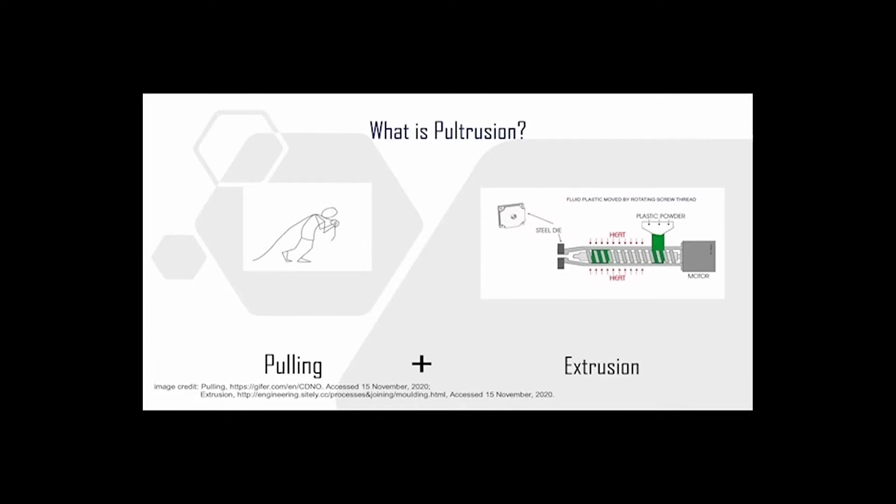It's a process that forces a thermosetting plastic through a heated die to form a specific shape, similar to the extrusion process. But instead of the material being pushed through the die, the material is pulled through in a pultrusion process. The introduction of the reinforcing fibers is a key feature of pultrusion.

It creates a composite polymer that is capable of handling high levels of mechanical stress while being much lighter than other materials with similar mechanical properties.

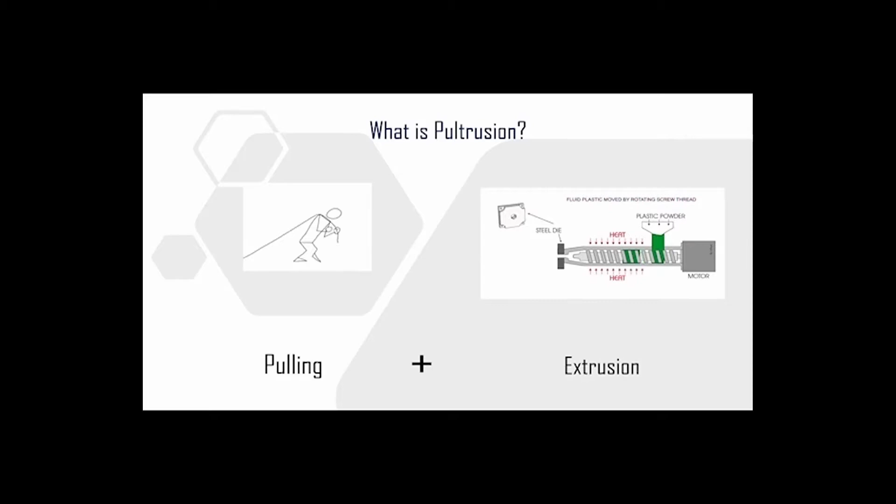So what kind of fibers are used for this reinforcing? Let's take a look at a few.

The most commonly used reinforcement material is glass fiber. This type of fiber has the benefit of being very inexpensive. It's also very lightweight, so it won't add much to the final weight of the product.

It increases the tensile strength of the composite product so that it won't break under tension, and it increases the resistance to impact and chemical degradation so the final product will last for a long time.

Some common polymer products that are reinforced with glass fibers include boat hulls, fiber optic cables, and large blades to be used on wind turbines.

Carbon fiber is another widely used material for polymer reinforcement. Carbon fiber is useful because it is incredibly lightweight, but while it is lighter than glass fibers, it is significantly more expensive. It is also strong and flexible.

When compared to a steel cable, a carbon fiber reinforced polymer cable had a higher tensile strength while having only 20% of the weight by mass of the steel. This makes carbon fiber an excellent choice when high strength to weight ratios are needed.

Carbon fiber reinforced polymers are commonly found in the aerospace industry. They are used in some sports equipment such as golf clubs and snow skis, and they are also used in the construction of high-performance automobiles.

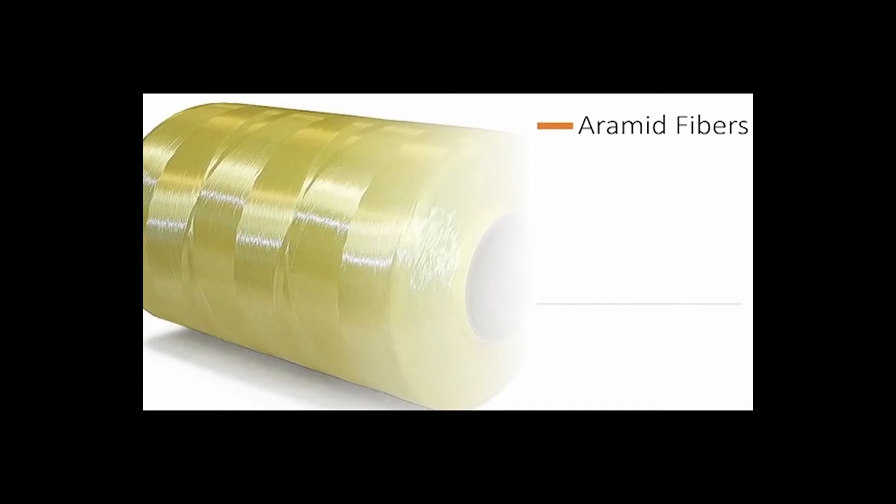Aramid fiber, more commonly known as Kevlar or Nomex, is also widely used in the pultrusion process. Bulletproof vests are constructed of Kevlar, so a polymer reinforced with this material should be expected to have an extremely high impact resistance. Aramid polymers are also very lightweight, and they have a very high resistance to heat and corrosion.

Aramid fibers can be found in things like hard hats, tennis racket strings, and in polymer materials that need to be incredibly resistant to heat or impact.

So we know that pultrusion produces a final product that is lightweight and durable, but how do we go about introducing the reinforcing fibers to the polymer material? Let's take a look at this animation to get a better understanding of the pultrusion process.

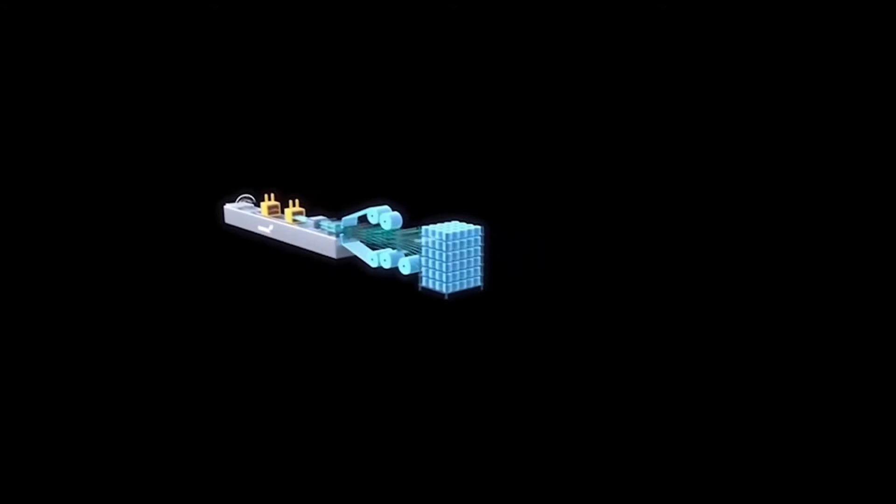Here we get our first look at a typical pultrusion machinery setup. The process starts here at the creel, where spools of the reinforcing fibers are housed and fed to the later stages.

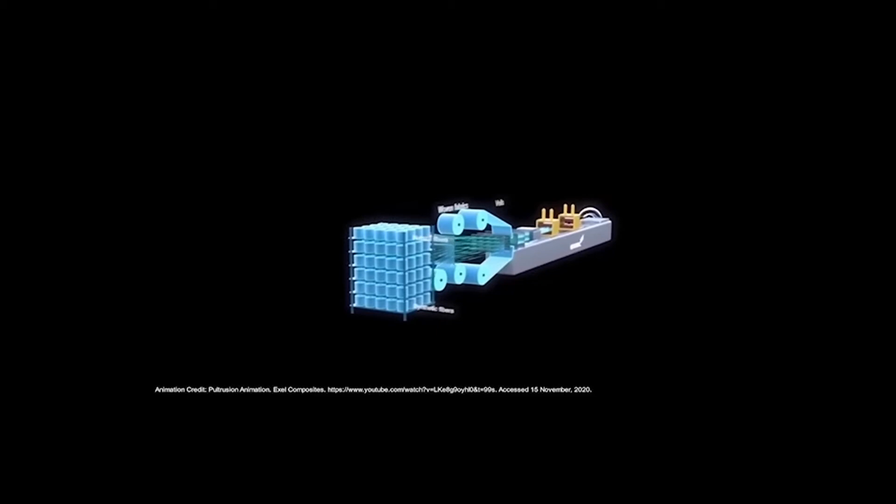In addition to the fibers, some setups will have woven fabrics that are used as veils or coverings that add an extra layer of protection for the underlying material.

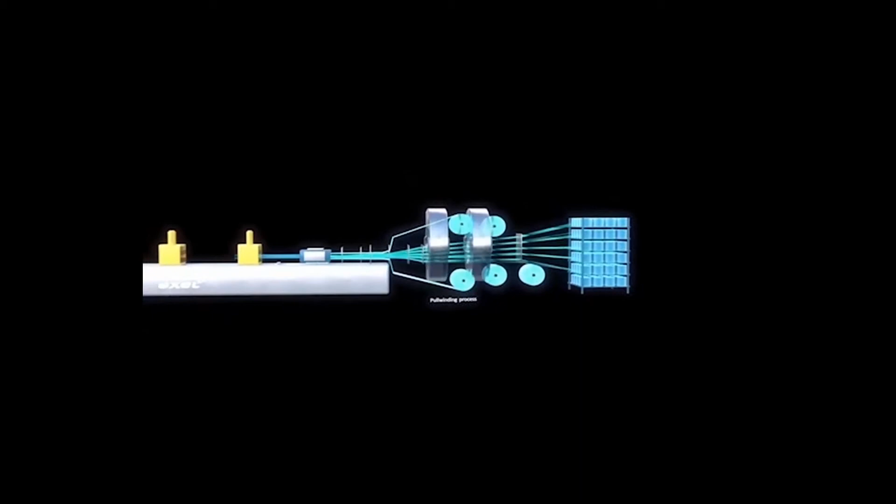Here we see the pull winding process, where the fibers are braided into a shape that will be integrated into the final polymer product.

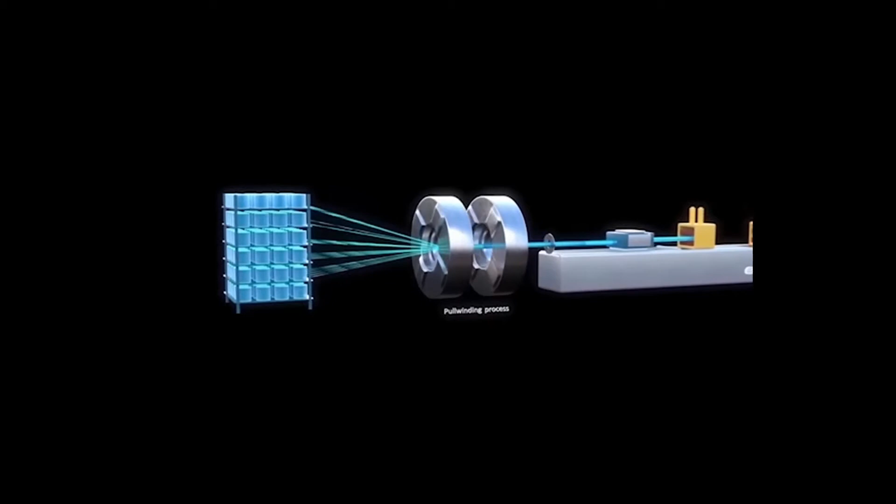After the fibers have been wound, they need to be impregnated with a thermosetting resin. This can be done in several different ways, but common methods include running fibers through a resin bath or injection of the resin into the braided fibers.

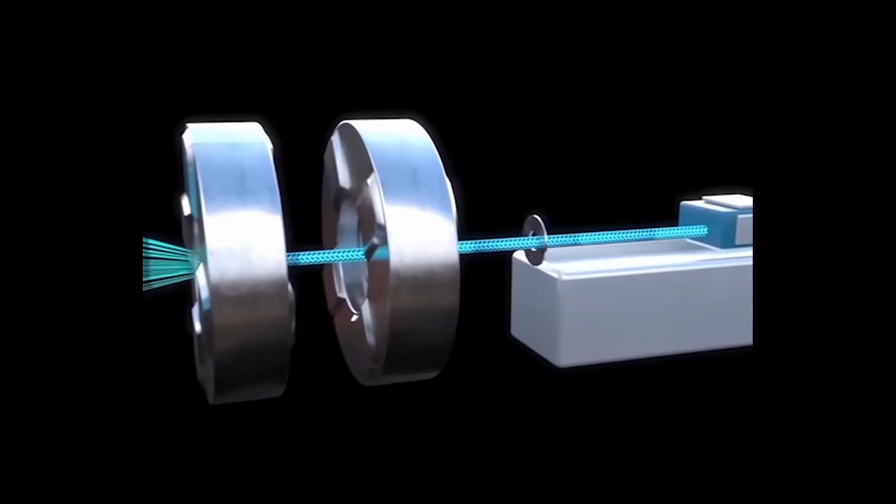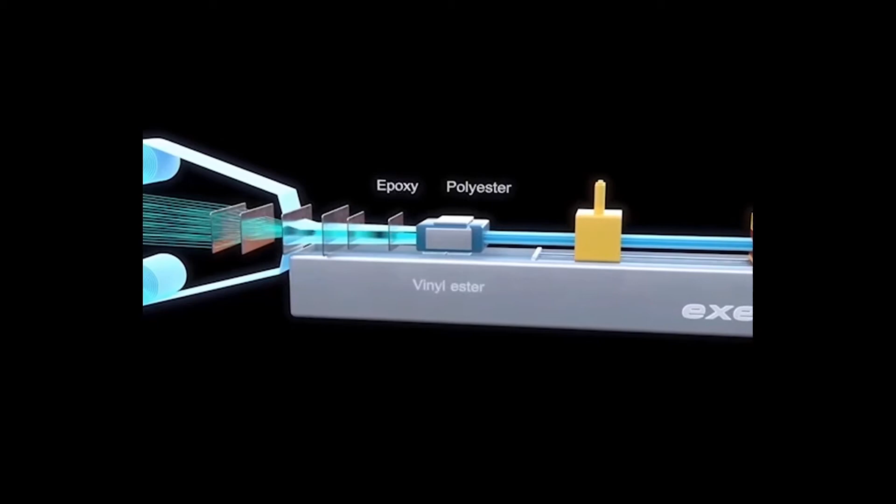There are several resin options to choose from. Polyester is most commonly used, but epoxy, vinyl ester, and polyurethane all have applications in the pultrusion process.

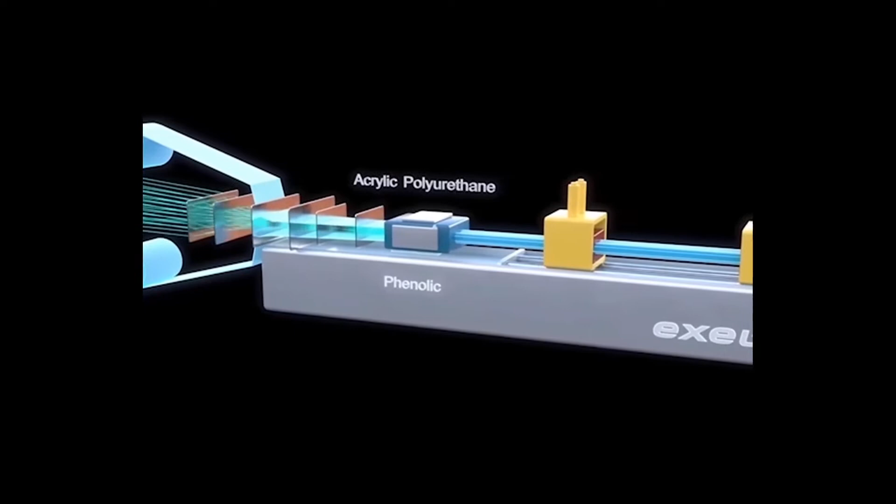After the fiber reinforcement is soaked with resin, it enters the die where it is shaped, heated, and cured. When the polymer is set, it is pulled out of the die. Here we see a pair of reciprocating clamps pulling out the product, but simple rollers can also be used.

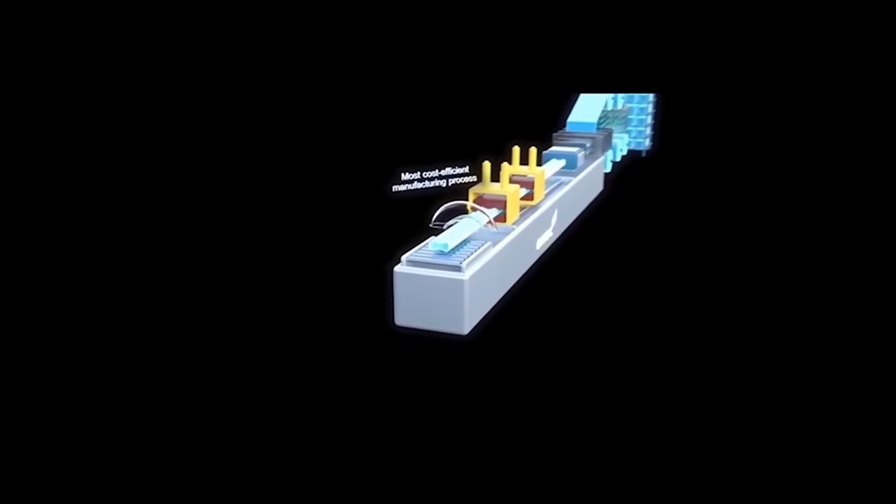The cured polymer can now be sent to a saw or some other cutting device where the final product is sliced to the desired length. The final product is now ready to be used for its intended purpose.

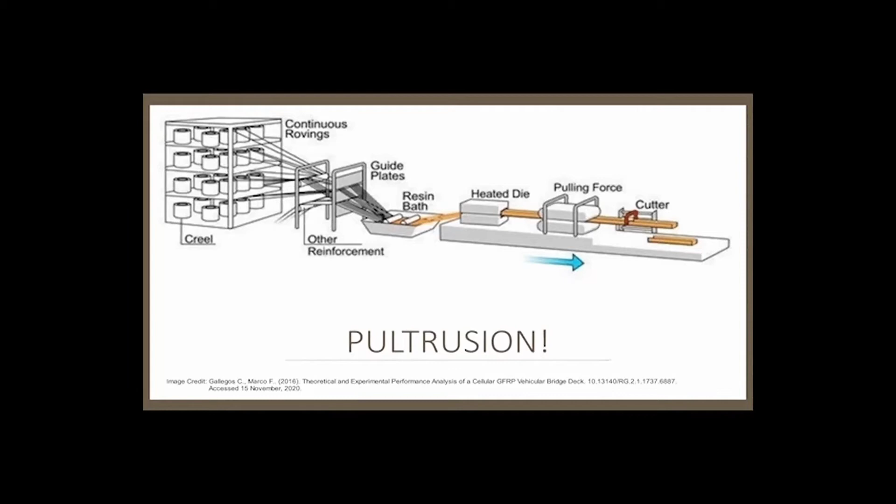Well, that's an overview of the pultrusion process. Hopefully you've learned a lot, and you now have a better understanding of what pultrusion is. The important thing to remember is that pultrusion is used to make a strong, lightweight product that has a number of advantages over other materials like metals and wood. Later, we'll talk in detail about the ways pultruded products are used and the types of benefits that pultruded materials have.

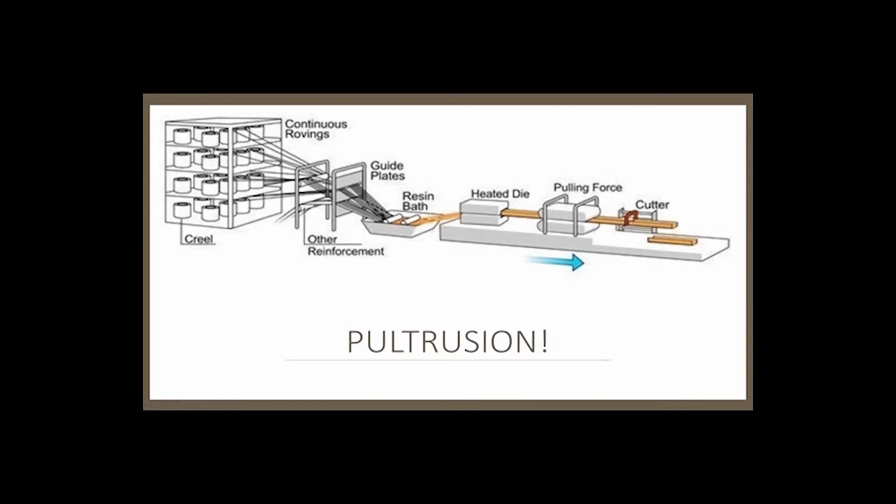Hey guys, how are you? How are you? I'm fine. What are you doing? James here is explaining me about pultrusion process and it's very interesting. Oh, that's cool. I know some stuff about pultrusion. Really? Do you know anything about the history of pultrusion? Yes, let me explain to you.

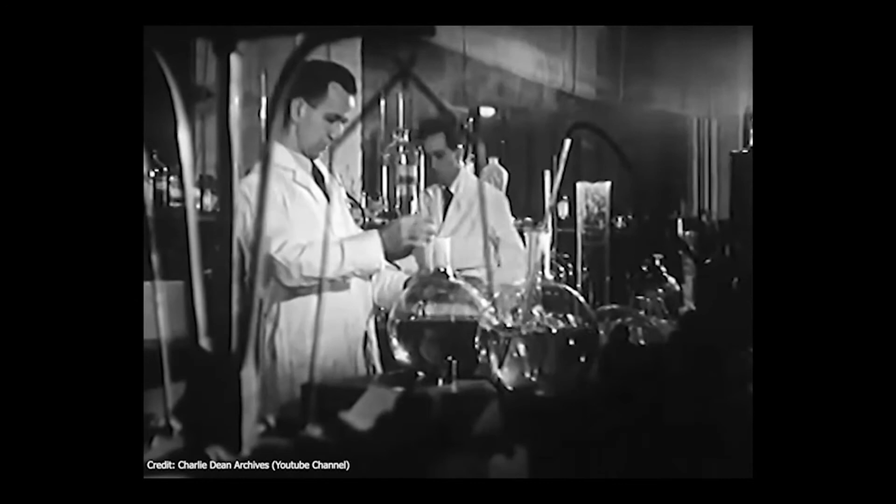After the formation of Rubber Reserve Company in 1940, many synthetic resins were invented and became available. This led scientists to propose different processes to use these polymers in producing different products. Pultrusion was one of the early inventions from 1940 to 1960.

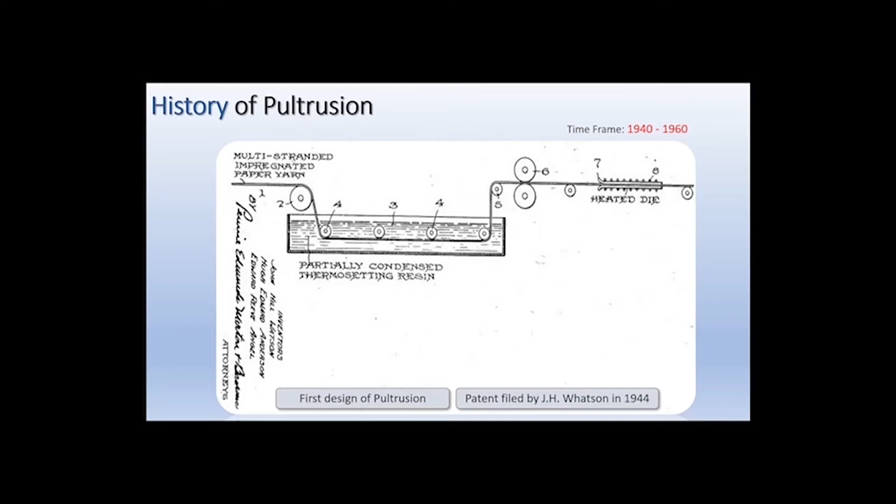In 1944, J.H. Whatson and his team submitted a patent for the first time on pultrusion. Here you can see the design of Whatson's team from that patent, but the patent was not issued to them. Instead, the patent was issued to Goldsworthy in 1959. He filed his patent in 1953, 9 years after Whatson. However, Goldsworthy did some pioneering work to successfully commercialize the pultrusion process, and that is why he is widely recognized as the pioneer and inventor of the pultrusion process.

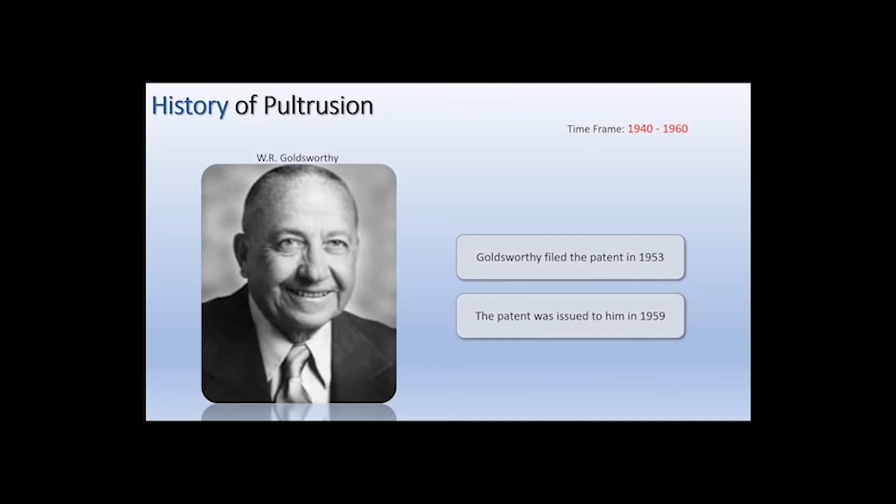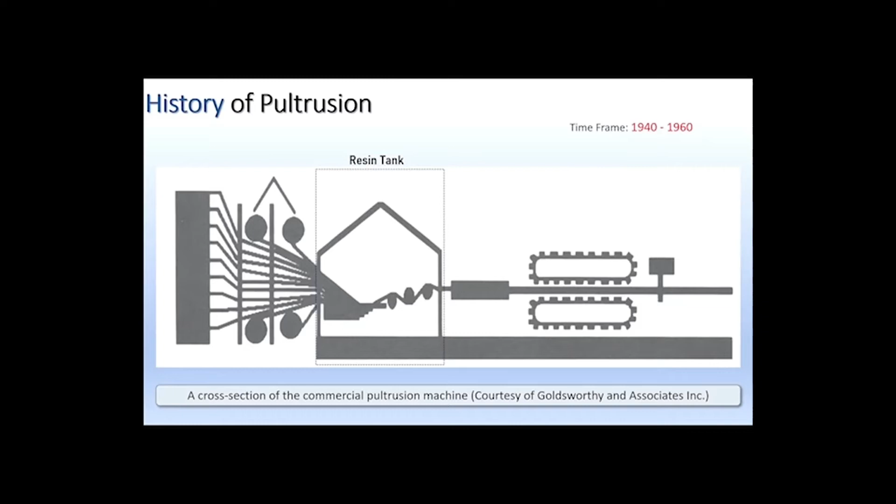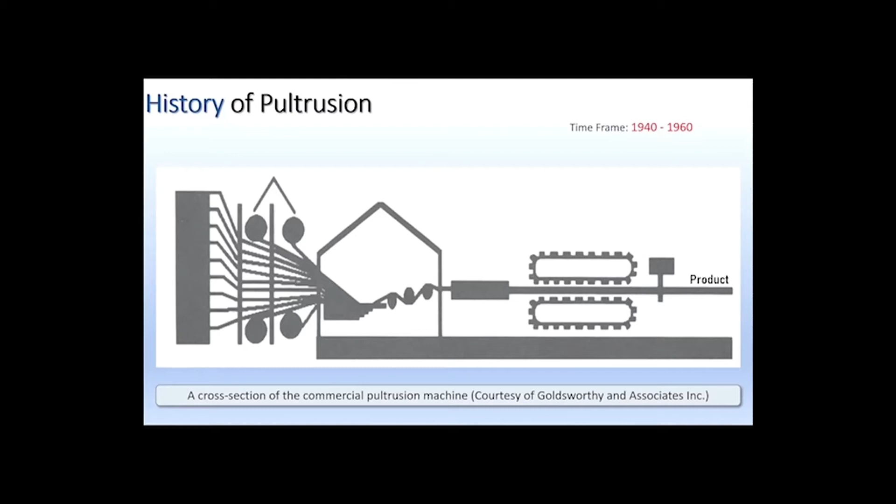Here you can see a cross-section of a commercial pultrusion machine from Goldsworthy's company in the 1960s. The machine was pretty straightforward. The main parts of the machine were the material racks, where the fiber reinforced materials were kept, a resin tank, where the materials were impregnated with resin, a forming die, where materials were cured by some heating devices and formed to specific dimensions, a pulling mechanism to pull the final product, and a cut saw to cut the product at a specific length. And that is how usually the final product was produced.

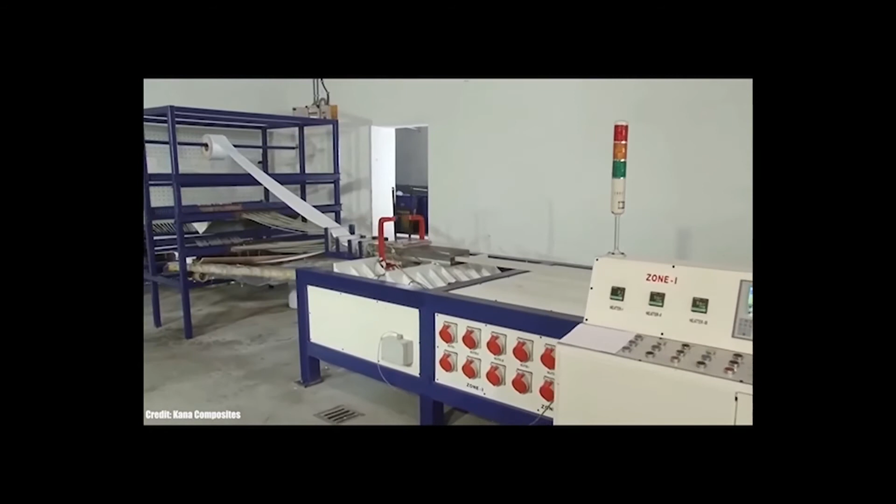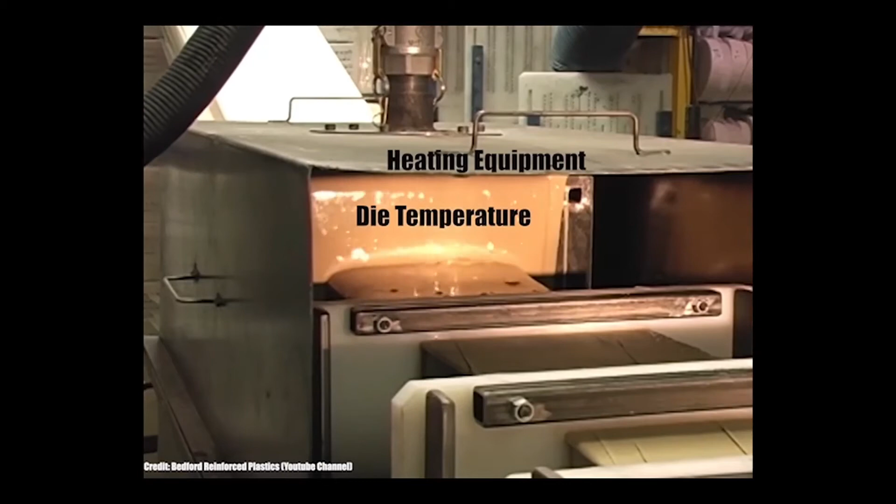There are many studies to determine different parameters for the optimization of the pultrusion process. Some examples of such parameters are pulling speed, viscosity of resin, number and position of heating equipment and electrical power unit, die temperature, etc. These parameters also depend on the types of fiber reinforced materials, resins, and dies used in the process.

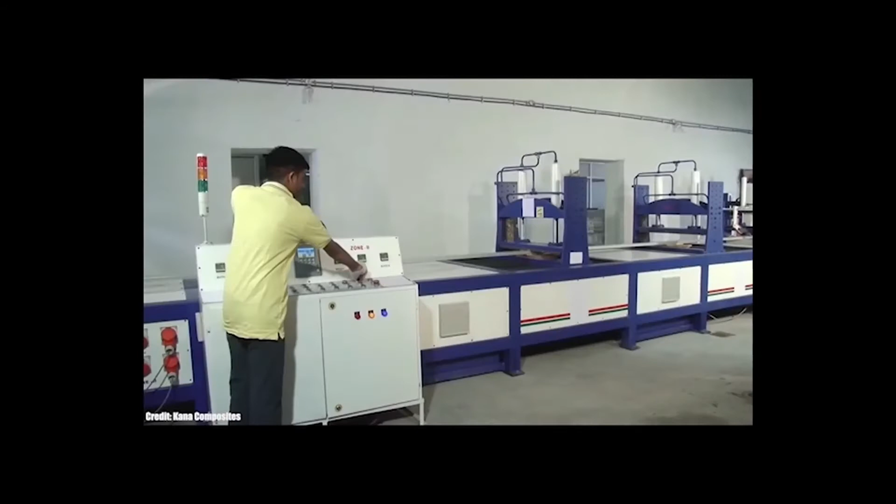Nowadays, a computer-aided PLC control system has been added to the pultrusion machine. This system gives the operator more control over these parameters to optimize the process for better products.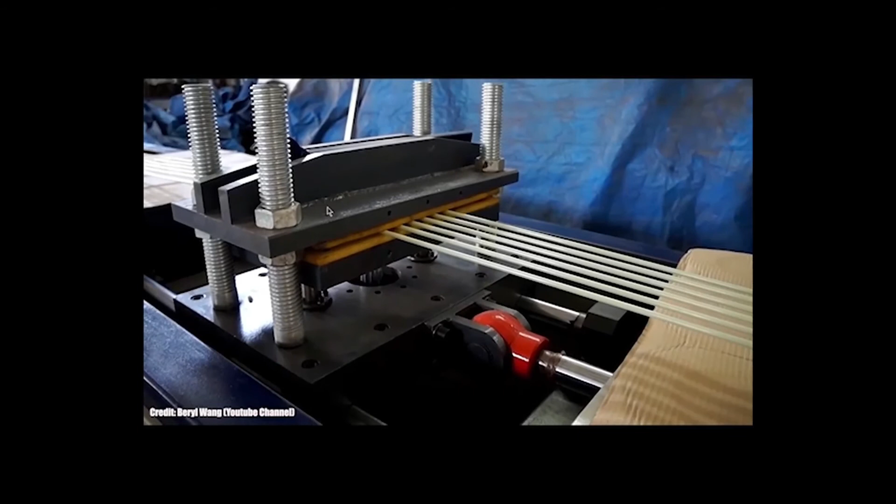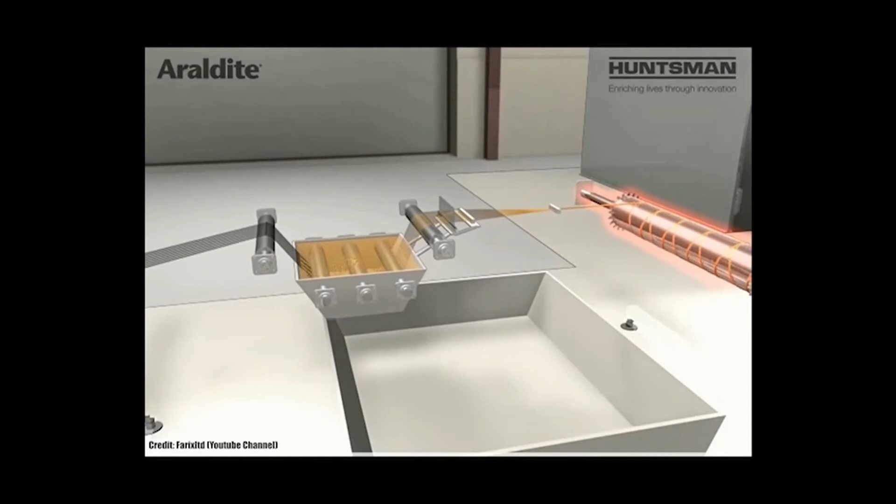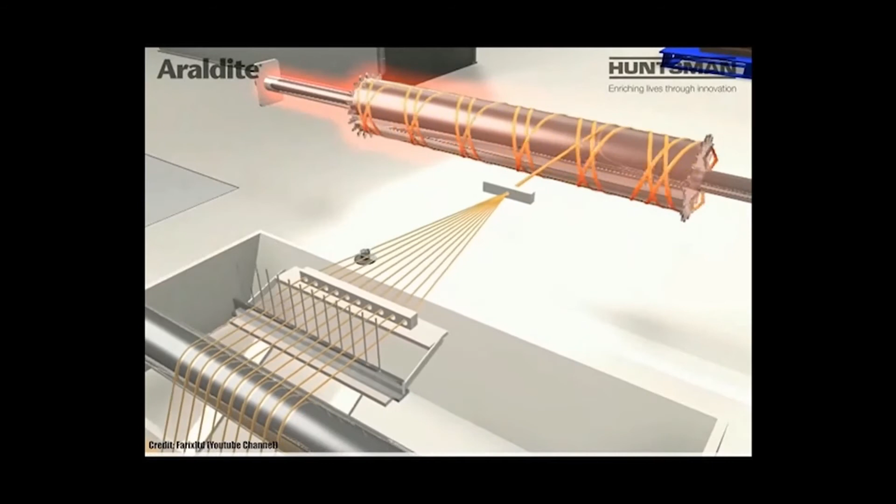Now let's see some of the important modifications of pultrusion machines. In the early time, the pultrusion machine could only produce structures with straight length and constant dimensions. To solve the problem, the molding system has been modified. Here you can see one process which can make tubular products by the constant winding of the filaments around the mandrel. Goldsworthy also proposed another process called pull forming in 1986 to create both straight and curved structures.

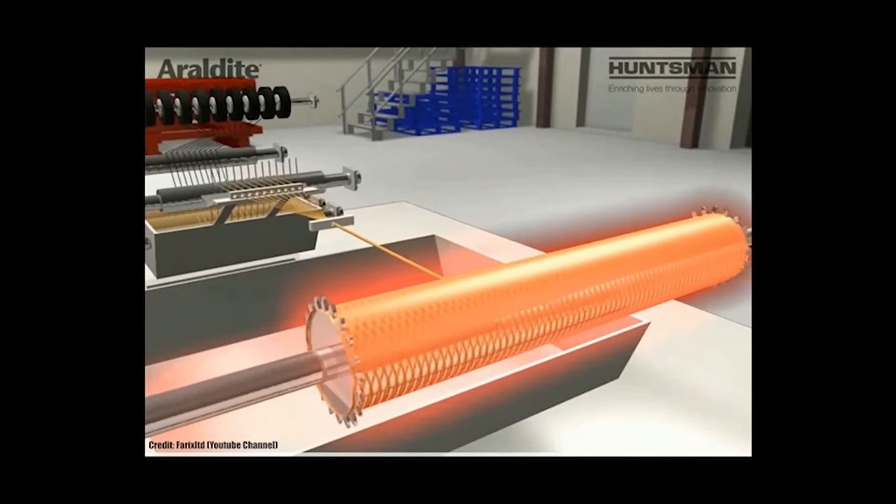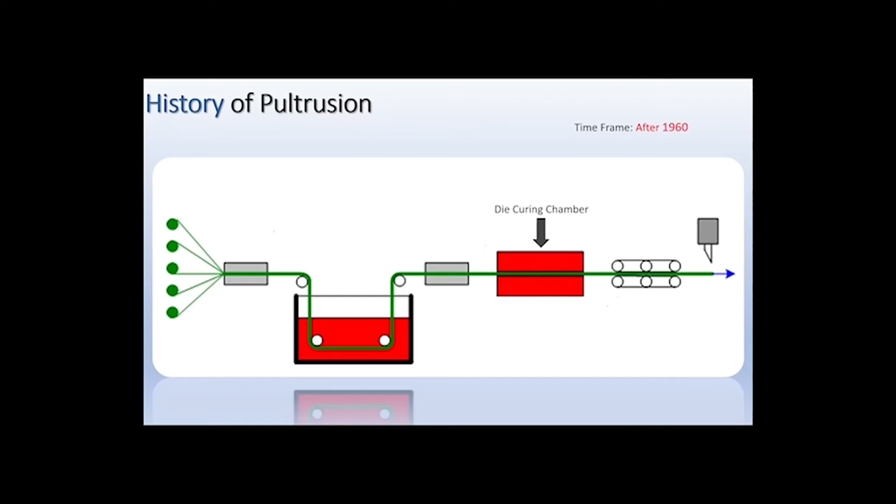The die curing chamber has also been modified over the years. Pre-curing and post-curing chambers have been added for better products. Also, more energy efficient heating processes have been introduced instead of costly and less energy efficient electric heaters. Some examples are UV assisted curing, microwave curing,

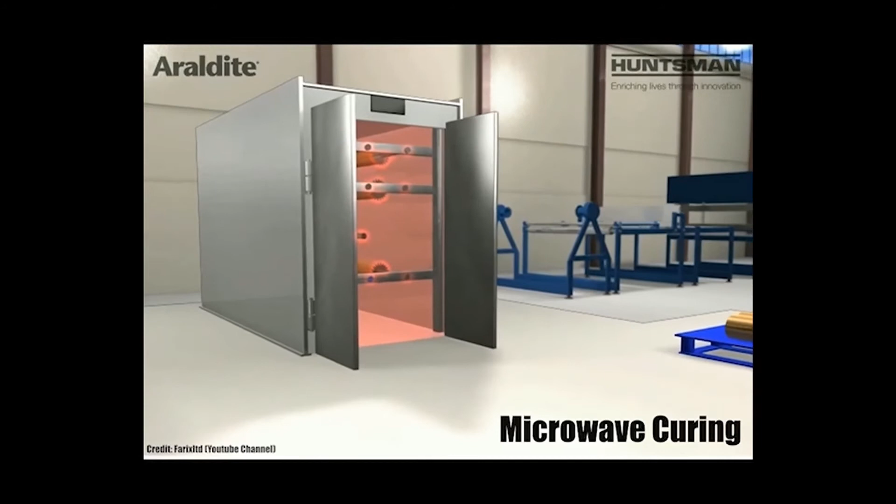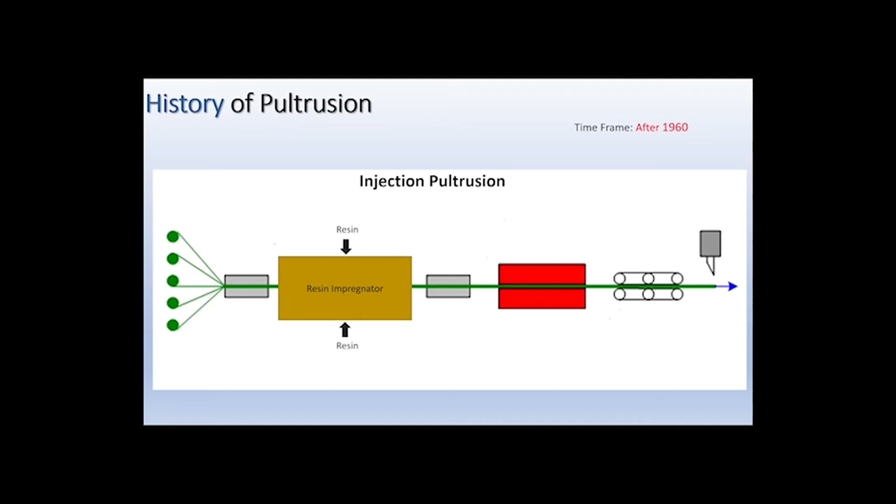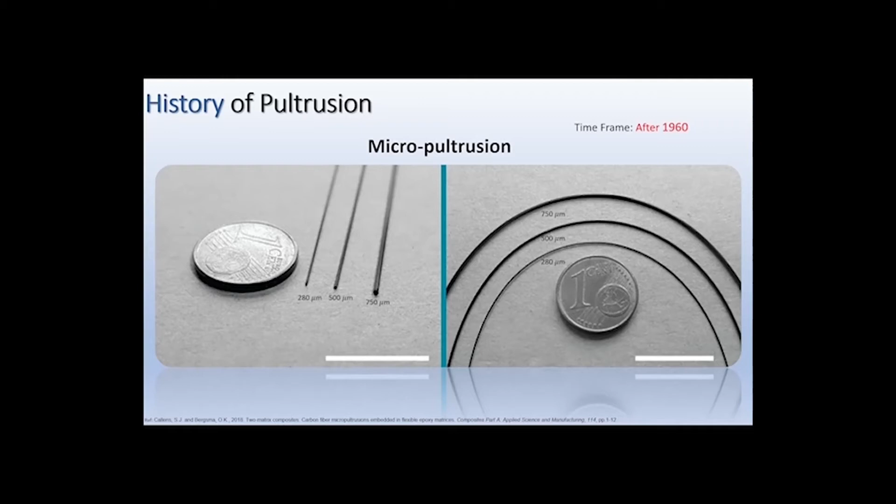Sometimes resins can be injected from the top and the bottom parts. This is called injection pultrusion. The pultrusion process has also been used to produce micro-size structures. Here you can see 3 rods having diameters of 280 micrometers, 500 micrometers, and 750 micrometers. These were fabricated using micro-pultrusion technology. This creates an enormous opportunity to use pultruded products in different fields like medical sectors and aerospace technology.

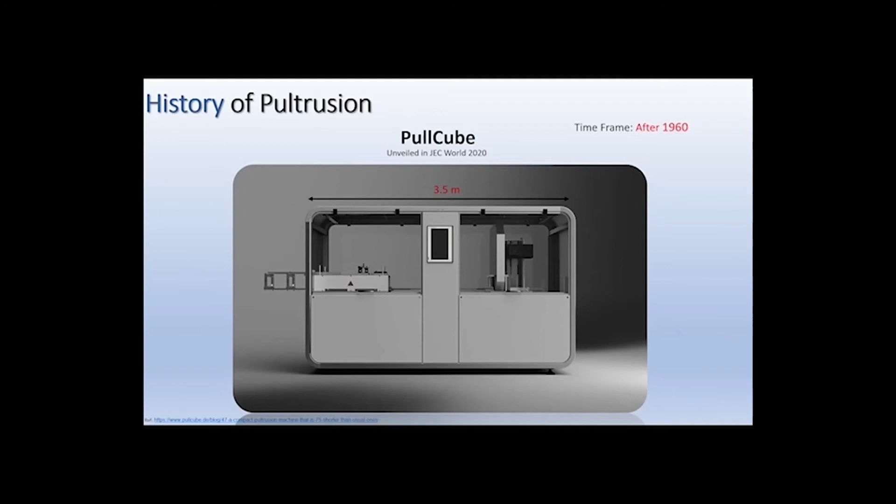There is continuous research and innovation happening in the pultrusion process. That is why the number of manufacturers increased from 20 in the 1960s to 300 in 2006. The numbers are increasing continuously and it is getting popular all over the world. So we can say the future is very bright for pultrusion.

Oh, I get it now. But I have heard about other processing techniques like extrusion, injection molding, etc. Pultrusion, how is it different from other techniques like these? I have a friend that's working on this project with me. I think he can explain it better. Let's give him a call.

Woojun, how are you? Good, how are you, James? I'm doing good. I was hoping that you could help my friend better understand the differences between pultrusion and other polymer processing methods. Oh, yeah, sure, I can help you with that. Let me show you my video. Cool.

Here is one of the best composite fabrication processes called pultrusion. What makes the pultrusion process widely used in many industries?

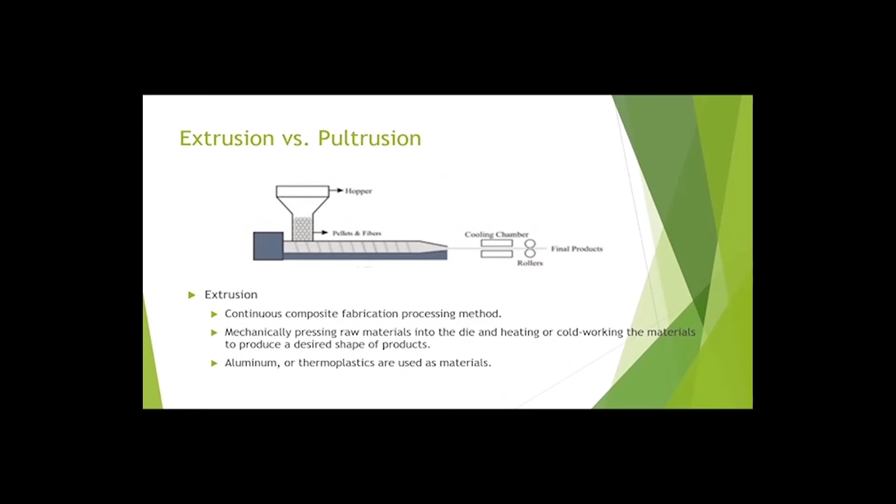Let me start with comparing the pultrusion process with a similar method called extrusion process. Extrusion is one of the continuous composite fabrication process methods, pressing raw materials such as aluminum into a die, and heated or cold worked aluminum becomes a desired product. Commonly, aluminum or thermoplastics are used for the extrusion process.

Unlike extrusion, in the pultrusion process, a compound word of pull and extrusion, materials are pulled from a roving and saturated with resins in the resin bath, then cured in a heated die. Glass, carbon, or aramid fibers are commonly used as reinforcing materials from the roving. The resins used are polyester, vinyl ester, phenolic, and epoxy resins. The final composite from the pultrusion process is called fiber reinforced plastic or polymer, FRP.

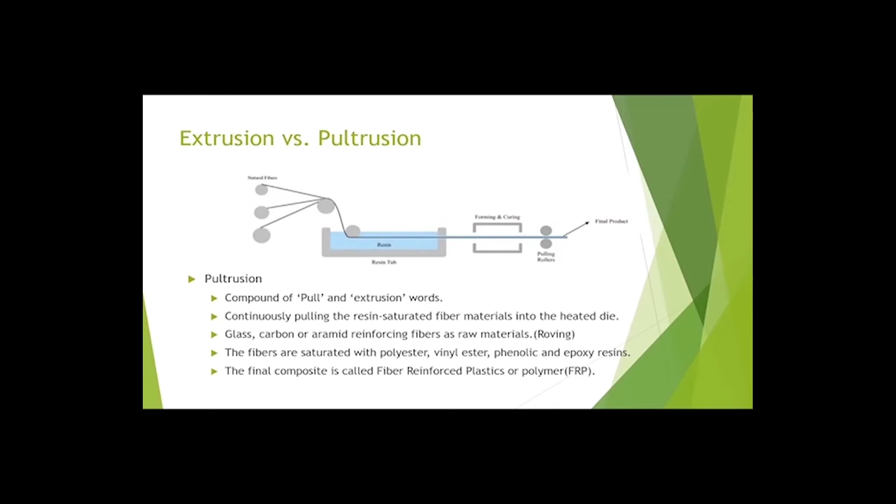FRP has high strength to weight ratio, less heat and electricity conduction, and corrosive resistance. It is versatile. The pultrusion process is considered to have fast processing speed, mostly 0.5 to 2 meters per minute. In 2017, there was a recent development by Krauss-Maffei, a German company. Their new pultrusion system called iPul system can reduce the processing time to 3 meters per minute.

FRP also has a uniform profile over the cross-section, which results in consistent mechanical properties over the cross-section.

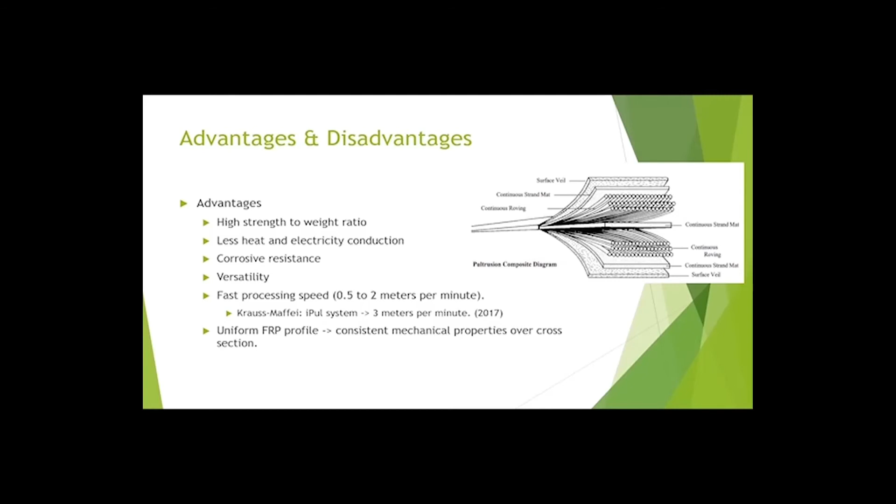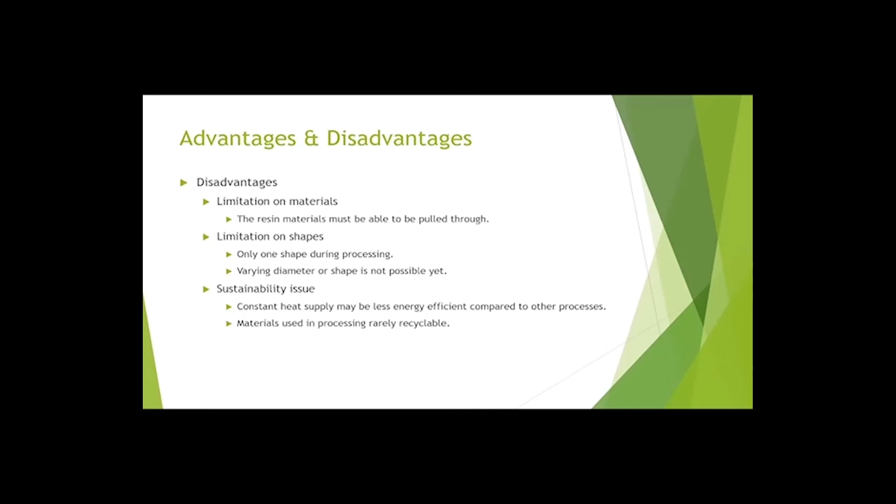However, the pultrusion process has some limitations. The resin materials must be pulled through the die, and varying diameter or shape during the process is not feasible. With constant heat supply to the die, it may be less energy efficient than other fabrication process methods. Moreover, the materials used in processing are mostly not recyclable.

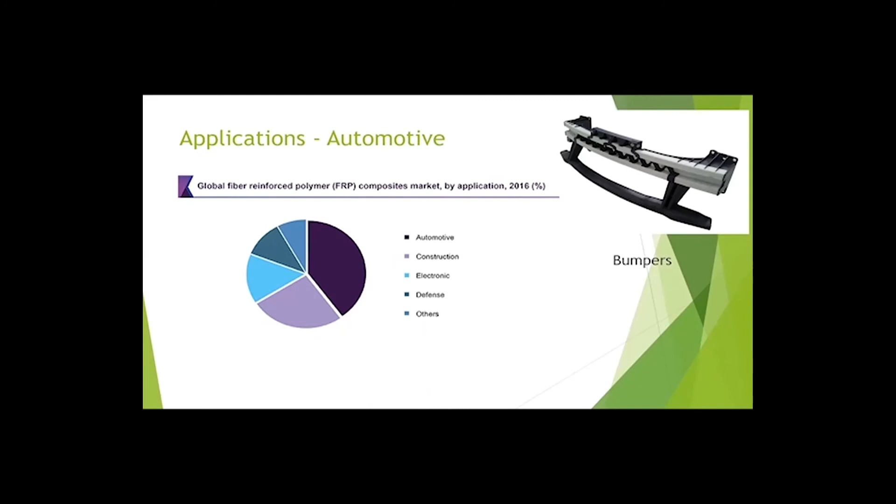Where are the pultrusion process and FRP used? Because FRP composites are versatile, they are globally used in various fields such as automotive, construction, electronic, and others. In 2016, FRP composites were used in the automotive industry at approximately 40% share. Because of their exceptional lightweight to strength ratio, many auto companies have desired to use FRP composites for bumpers and other frames of an automobile.

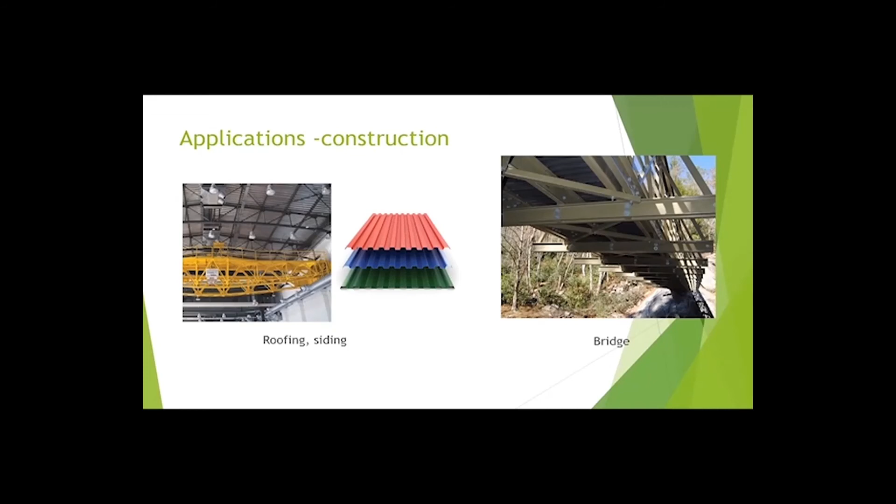With the lightweight advantage, FRP composite also plays an important role in the construction industry. Roofing and siding, even some bridges, are made of FRP composite. FRP composite is used in chemical and oil plants because of its high corrosive resistance and less heat and electricity conduction. Handrails and floor gratings made of FRP composites can stand under chemical environments such as water treatment areas.

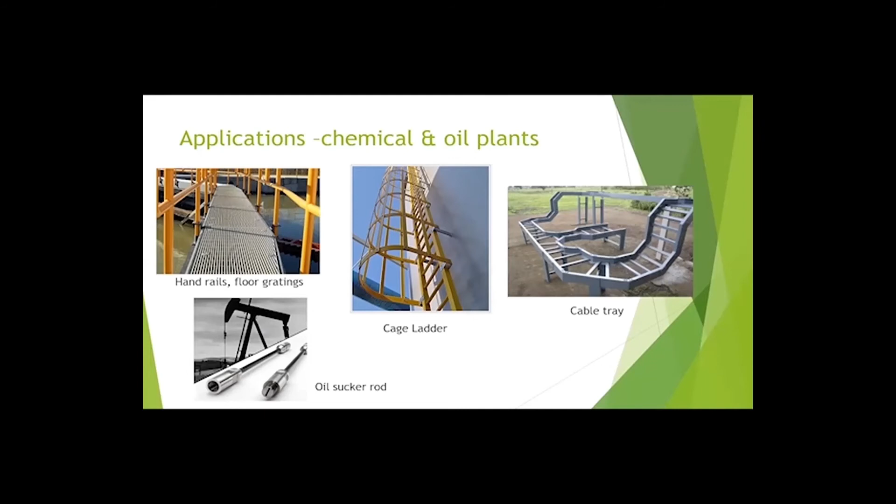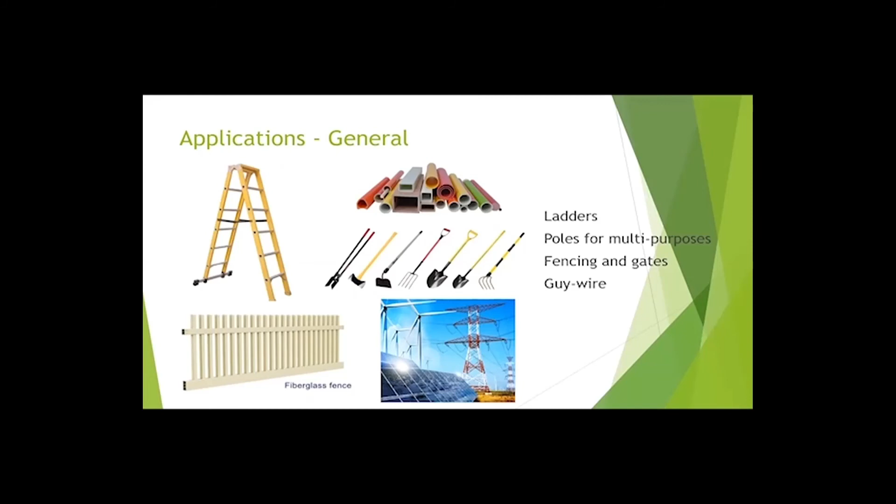Generally, FRP composites can be seen in our daily lives: ladders, poles such as snow or golf poles, fencing and gates, even guy wires.

FRP composites produced from the pultrusion process have been widely used in many different applications. Because of their outstanding properties, it is expected that the global market value of FRP composites will keep increasing. In 2020, the global market value was calculated as $121.39 billion. According to the research report, the estimated global market value reaches $198.71 billion with a compound annual growth rate of 8.6% by 2026.

Yeah, I understand the difference better now. Thank you, Kim. Well, now that you have a better understanding of the process, maybe you can help me with the last portion of the project. Do you have any ideas for ways that pultrusion can be used in the future, or any improvements that could be implemented? Yeah, let me think of it.

I work with biopolymers in my lab. Do you think using biopolymers with antibacterial properties in this pultrusion process could coat composite materials to form devices or surfaces with antibacterial properties? These surfaces need to be coated frequently at equal intervals of time as of now. If this pultrusion process is used for forming this resin-based coating on these devices, it will be a good boon for the biomedical industry, and I think that will be a good futuristic view.